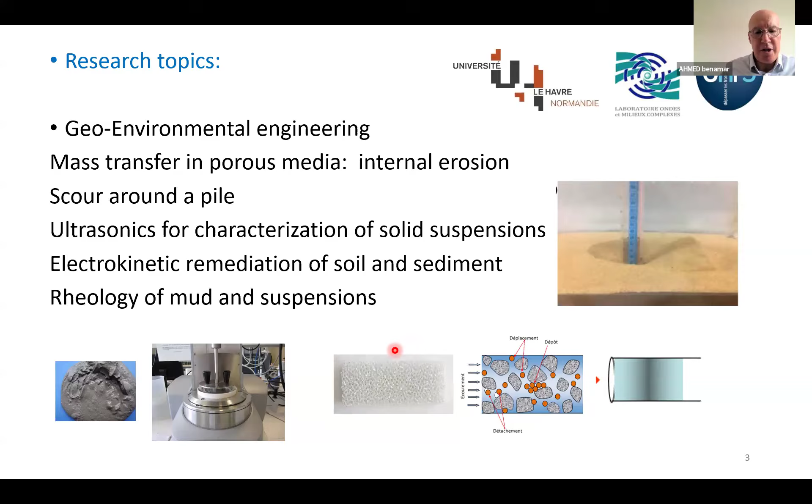Since we are in this area of maritime port, Le Havre is the first maritime port in France. So huge volumes of sediments are dredged annually. In Europe, there are 200 million cubic meters of sediments dredged each year, and in France, 55 million cubic meters are dredged, of which 24 million are contaminated.

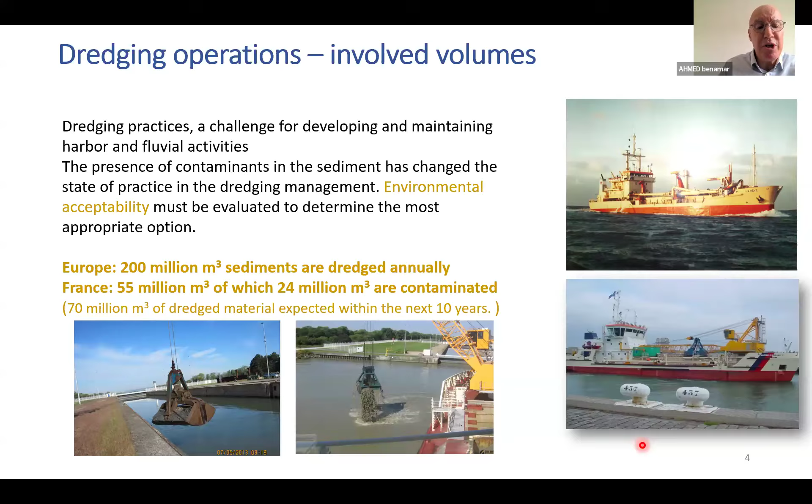This contamination has to be treated, and we use electrochemical technology to start remediating this material. These volumes are expected to increase up to 70 million cubic meters in the next 10 years.

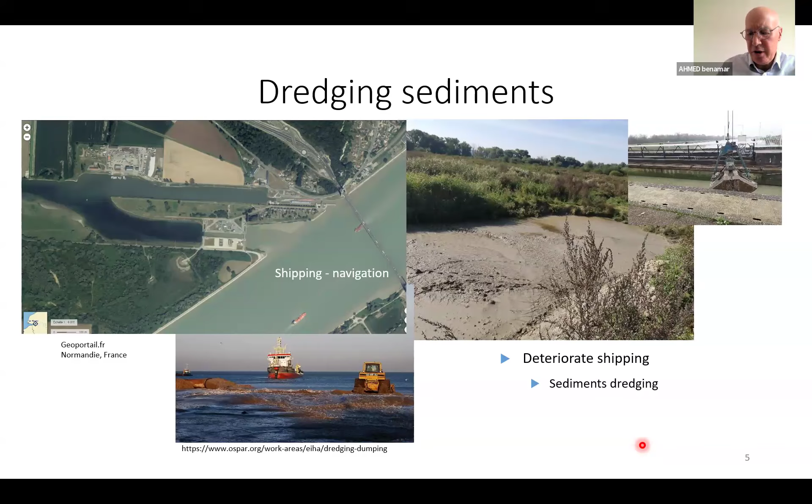In Le Havre, the silting of sediments is a huge issue, and in many operations the port had to dredge sediments and clap or dump them very far from the dredging location, so the cost can be more important.

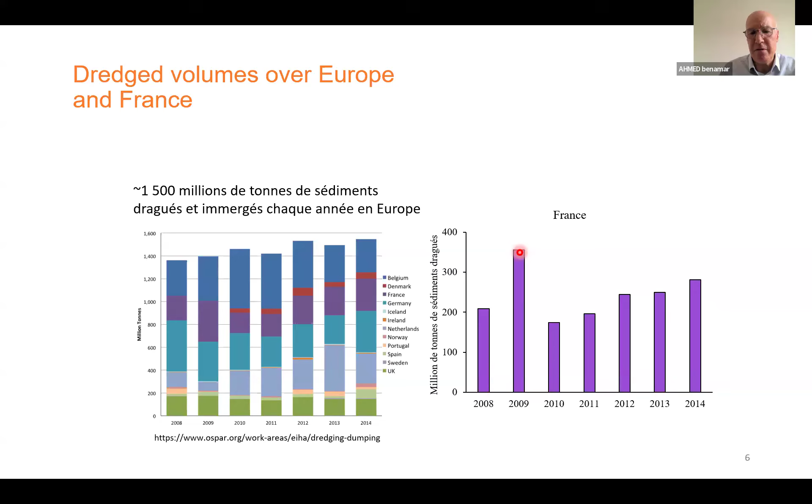So how are these sediments managed? 90% of these volumes are dumped in the sea, but submitted to regulations. Threshold values of pollutants are defined by European regulation, but adopted into local or national regulations, which define the allowed volume to be dumped in sea.

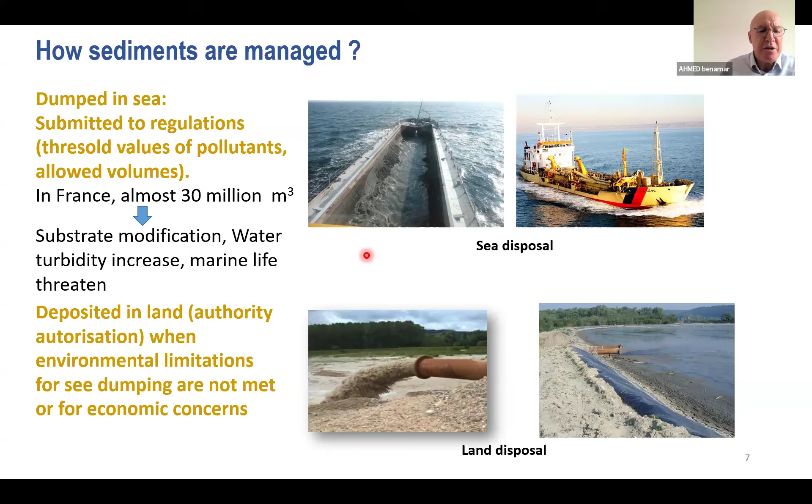In France, almost 30 million cubic meters are dredged and dumped. Substrate modification, water turbidity, and increased marine life threats were some issues which can be avoided if the sediments are deposited inland. Inland deposits are a special operation and not permitted every time—in Le Havre, for example, there were only 2 deposits for these sediments.

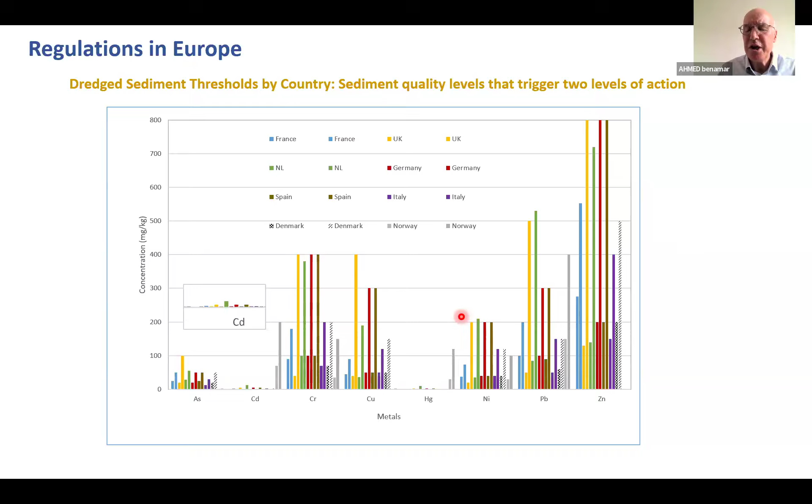As regards regulation in Europe, we see that the regulations are very heterogeneous. For example, for chromium, the limitations are maybe four times higher in many countries than in others. That's why many volumes of sediments can move from one country to another.

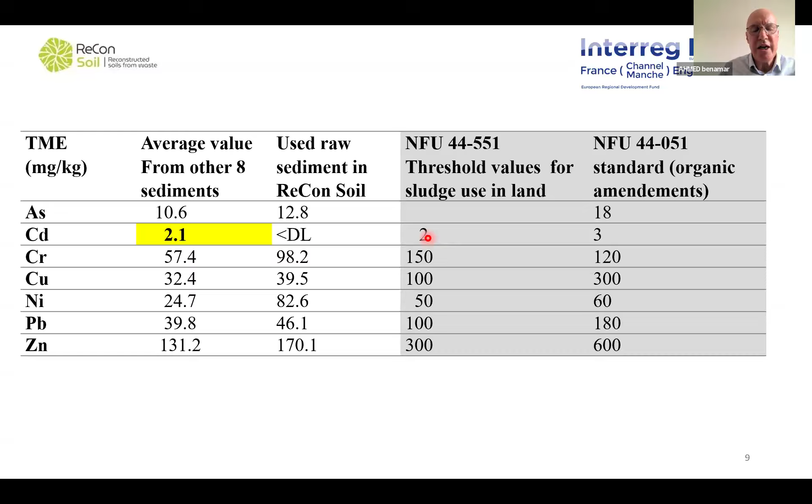These sediments are not so polluted, because as regards the regulations for sludge use inland or standard soil amendments, only cadmium exceeds the standard limit values. In France there are national regulations about soil, but no regulations about sediment. Sediment is regulated only regarding how many cubic meters of each volume can be dumped in sea, based on two levels, level 1 and level 2.

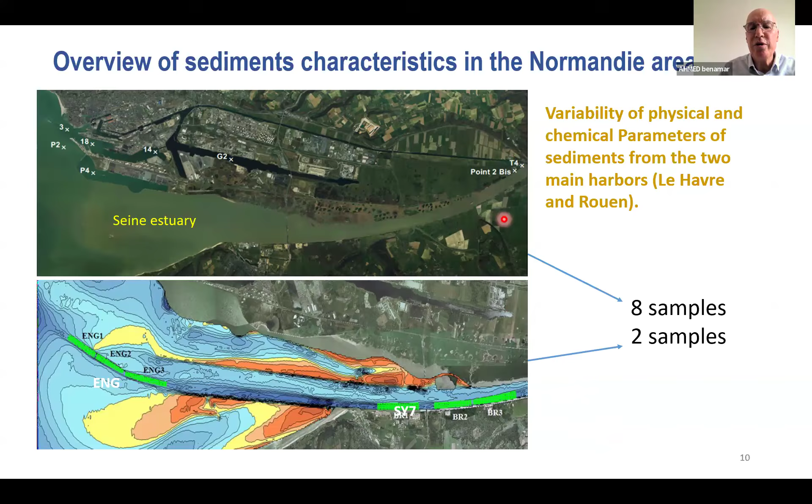In a past project we had to show how the variability of these sediments was over a large area, including the Port of Le Havre, the Seine River, and part of Rouen Port. 10 samples were collected, and from the grain size analysis we see that the extent of grain size is not so different, except for three samples.

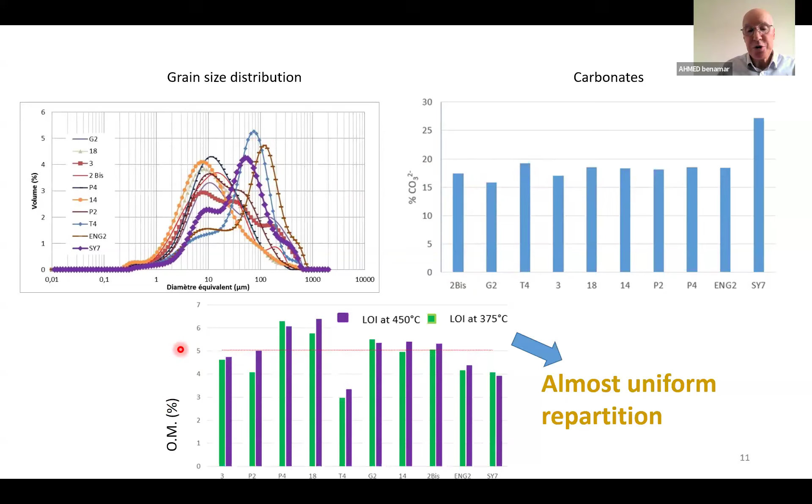The carbonates are also quite similar, around 20%, and organic matter is also similar, approaching 5%. This kind of investigation can show that this sediment can be used for any application, because we can expect regular characteristics for this material. This variability is also very low in chemicals and in minerals, so it can be interesting to use this sediment from a large area in Normandy.

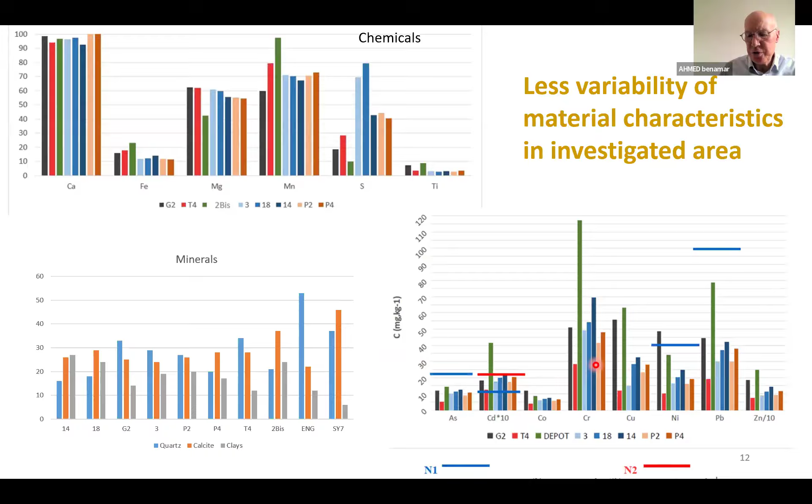As regards the two levels, level 1 and level 2, which are the regulations for dumping sediments in sea, in many situations these limitations were exceeded, but not by much.

So for the objective of using this sediment and keeping it inland, and maybe using it for valorization for reuse, two deposits were managed in Le Havre. The largest one is close to Tancarville, close to this bridge.

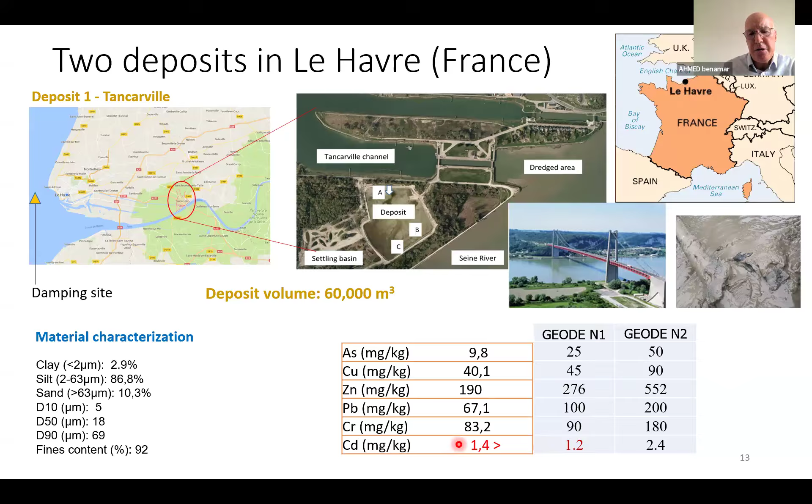There is 60,000 cubic meters of sediment deposited here in this area. For the sediment which was deposited, there is no excess of any metals, only for cadmium, which exceeds only by 0.2, so it's not so important. And this area was...

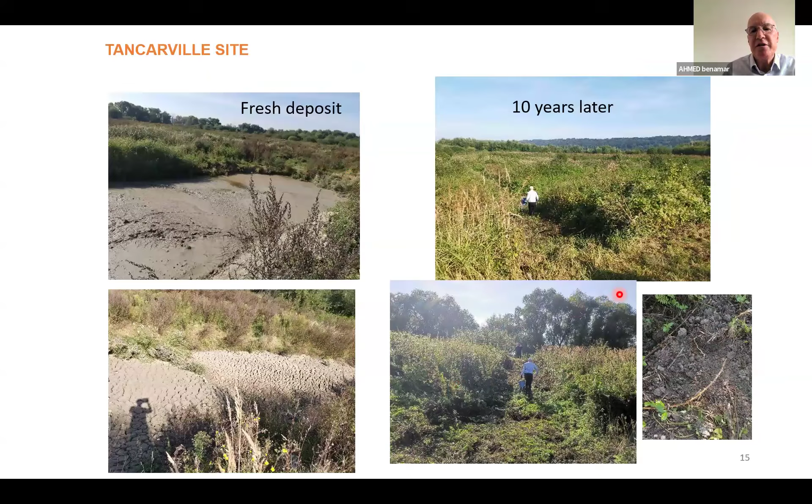immediately after filling the deposit, and 2 years later, the vegetation started to grow in this area. That shows that the sediment can serve as agricultural soil, as a medium enabling growing vegetation. And 10 years later, we see that it's almost a forest.

So this kind of deposit can be interesting for reuse in agriculture or in material construction. But the pollutant bioavailability is still there, so for many applications they may need to be remediated.

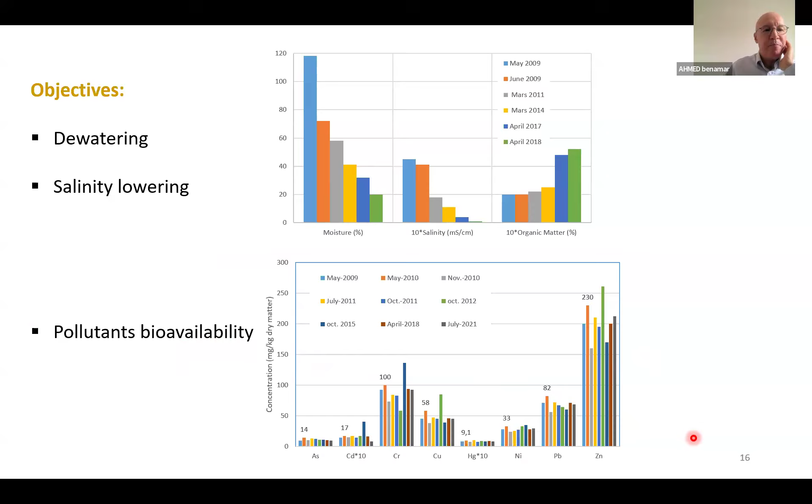The second deposit was managed during the project making bricks from dredged sediments, and this deposit was managed differently than the first one, with drainage and with a settling chamber.

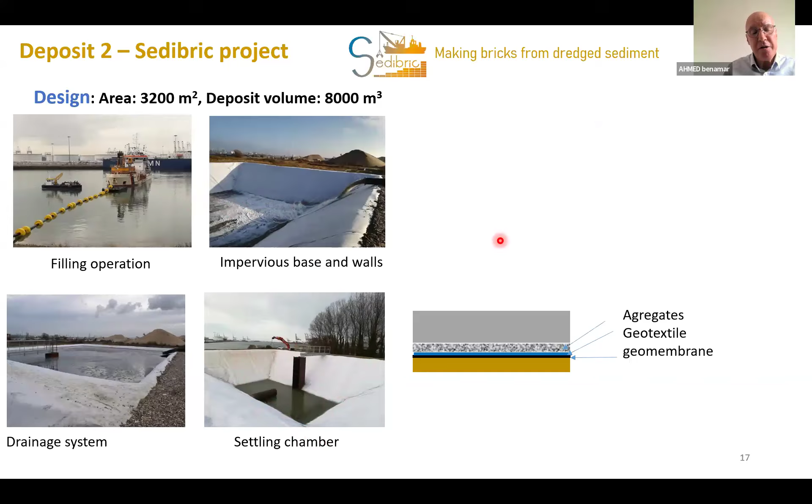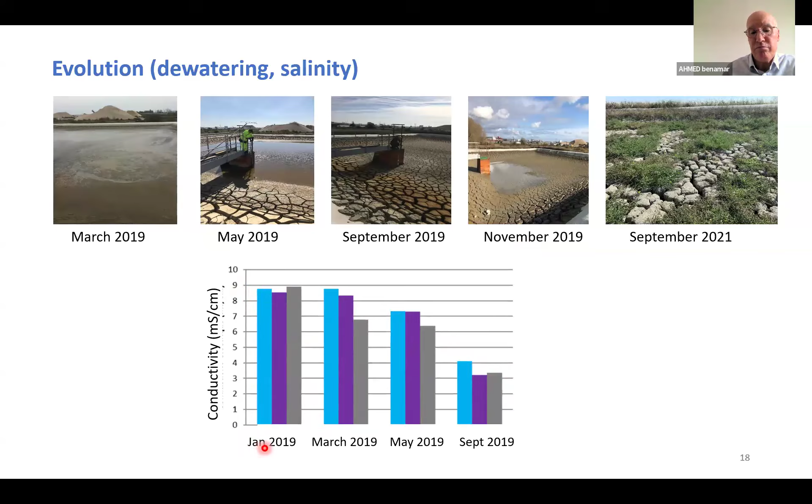So this deposit was monitored during many years, from 2019 to 2021, and we see that the conductivity, the salinity, decreased at 3 points recorded here. We see that the salinity decreased from 9 to almost 3, 3 times, in only 8 months.

Okay, so when the pollutant exceeds regulatory values, we need remediation. In our university, we started using electrochemical remediation because we are treating fine soil, fine material. Electrochemical remediation is deemed to be effective for this kind of material.

So we started with a small cell, and then we used a large setup with many kilograms, 60 kilograms of material, in order to mainly use this sediment in another project, but also to investigate the scale effect, the upscaling effect between the small setup and the intermediate setup, before using a field pilot.

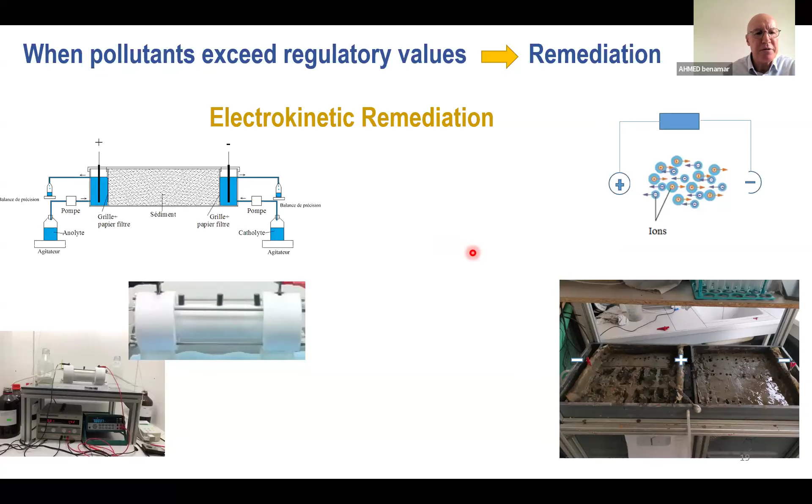The objective of sustainable electrokinetic remediation was to decrease chemical concentrations, dewater the material, enhance element bioavailability, using environmentally friendly additives, and reduce treatment costs by using less power consumption.

Here is the schematic drawing of the setup, and we have different additives used in many experiments, showing that EDDS and saponin, which are surfactants, can also be efficient for making the osmotic flow interesting, and so removing many kinds of pollutants.

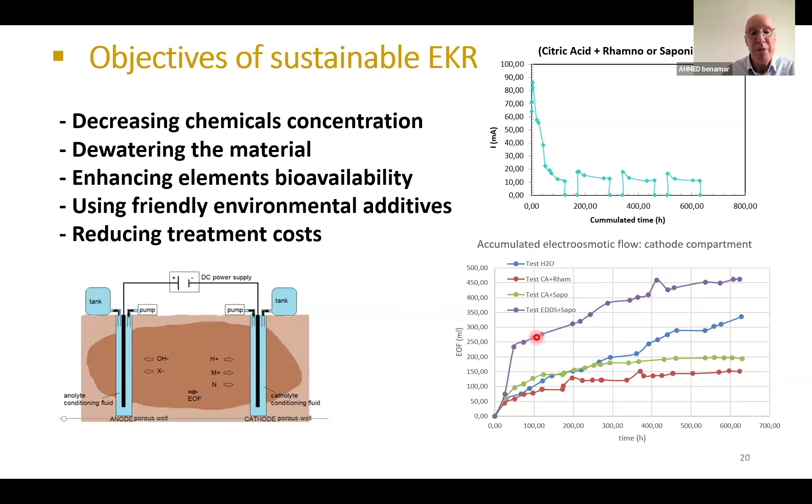Because we can treat different kinds of sediment soils, we investigate the effect of organic matter in different remediation tests. So we compare the application of EKR to reconstituted lab sediment and the collected sediment. The reconstituted sediment in lab was made according to the grain size distribution of the real sediment. It's a mixture of sand, silt, and clay, and we add 2.5% organic matter.

So in this case, the metals, mainly two metals, copper and zinc, move according to the charge. Here we see that with citric acid as additive, the lead moves to the cathode, toward the cathode.

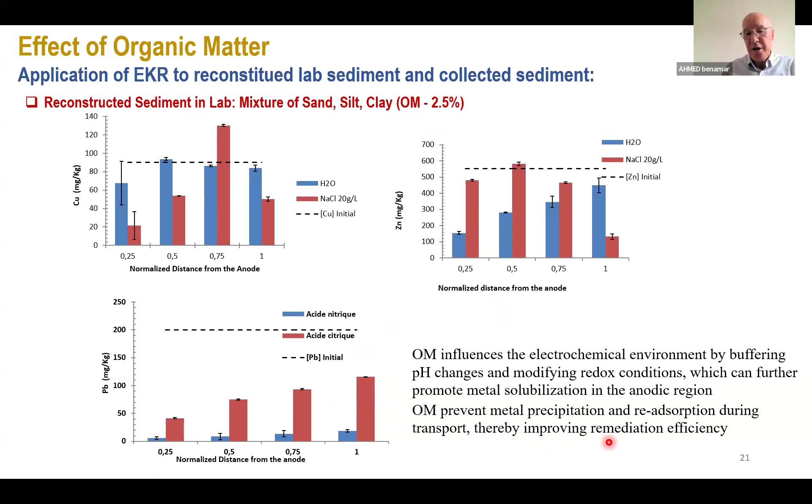But when we test dredged sediments from a deposit, which involve an organic matter content of 10 to 11%, we see that something happens: many metals can move. The cations can move to the anode instead of moving to the cathode.

This disturbance is due to the relatively high content of organic matter. So organic matter can play a role in the electrokinetic remediation process.

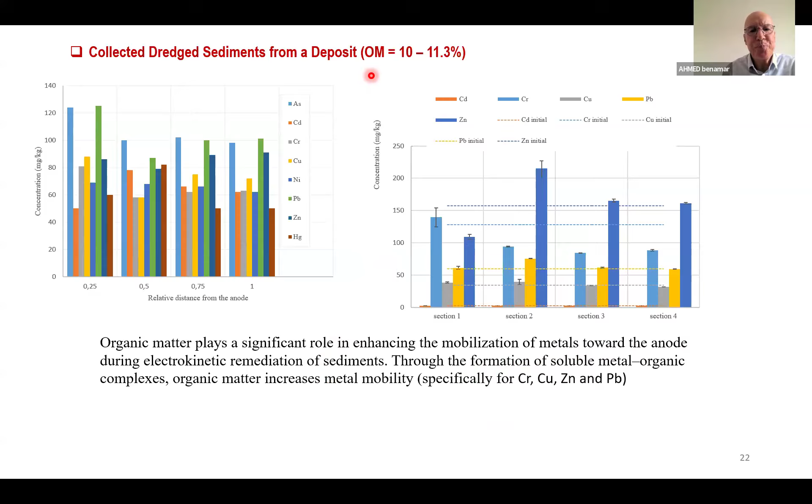After that, we used many sizes of experiments to start investigating the upscaling of this process in order to use it in the field. But we are still investigating this, because the theory of upscaling is different from other fields like hydraulics.

So we started by using bulk density as a parameter to be preserved from one scale to another, along with current density, temperature, and geometry. So when we increase the volume of treated sediment, the temperature rises and the process is inhibited.

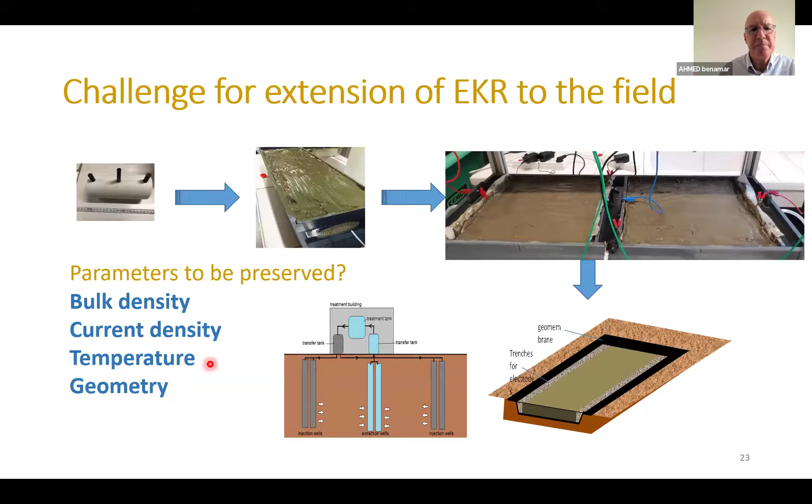So for using dredged sediments as a material for making soil or making construction materials, we started with this case of using sediment as a waste for reconstructing degraded soils. This is a European project which ended in 2021.

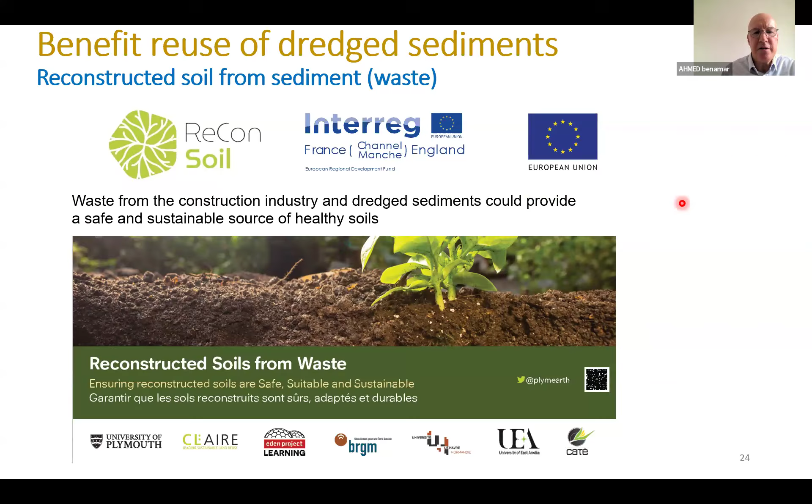Why can sediment be interesting for soil reconstruction? Because the sediments investigated in this area of Normandy ports are rich in fines, 92%, around 6% clay, and also rich in organic matter and other minerals. So they can be suitable to reconstruct soil.

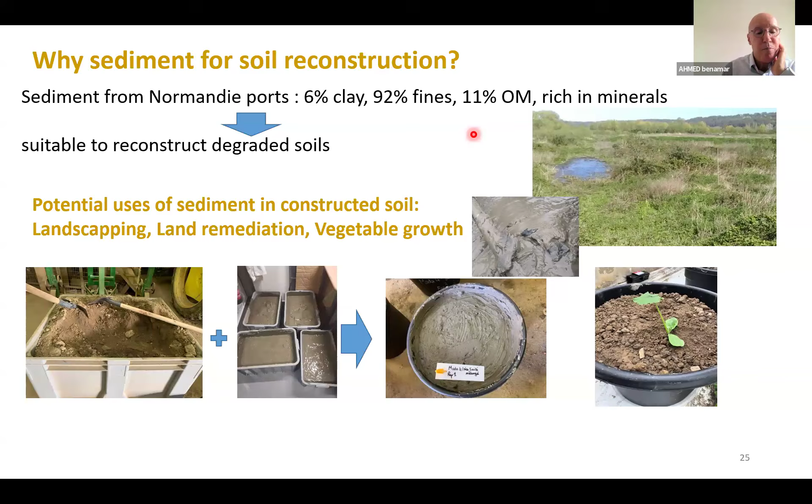In this project, we suggested from our side that dredged sediment be added to degraded soil in Brittany to grow zucchini. Other partners from the Geological Bureau in Orléans suggested that fines from byproducts be used also as amendment for degraded soil which was poor in fines.

This operation can be made in the larger framework of anthropization of the soil-sediment-soil cycle. Sediments are eroded from the soil, going to rivers and channels, so they are dredged and can be used for treating, reconstructing, or amending degraded or agricultural soil. This operation can be interesting in the framework of using waste as a resource.

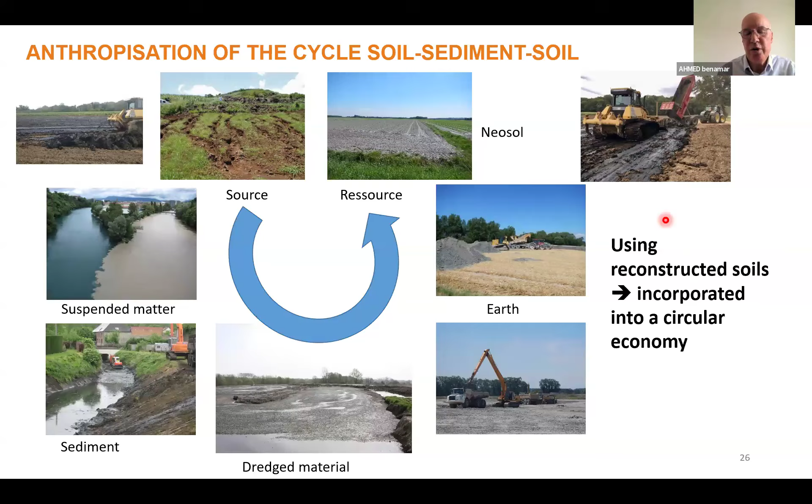The experimental setup for treating these sediments was in the same shape as the smaller setup. We treated more than 60 kilograms of sediment to be used for reconstructing soil. In this operation, we used non-treated sediment and electrokinetic treated sediment.

We wanted to see how the electrokinetic process changes the composition of the soil, and if there is any effect on growing vegetables or crops. So we checked where each process happens in the sediment during treatment, and the physical-chemical properties: pH, conductivity, redox potential during the experiment, and after the experiment, mineralogy, total carbonates, organic matter, and metals.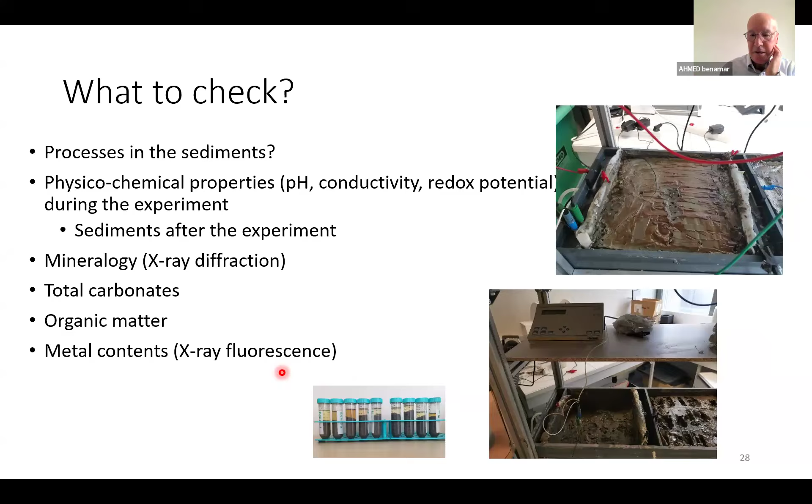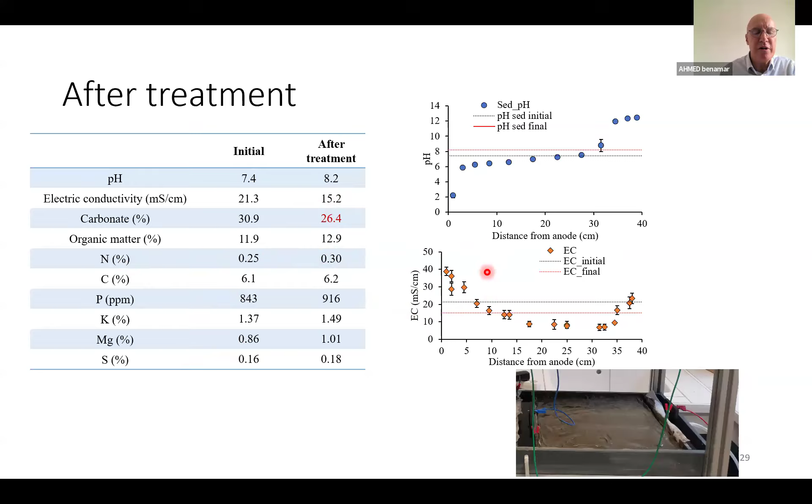After treatment, we see that only the carbonate decreased. There is no change in the other parameters, especially elements like nitrogen, carbon, phosphorus, potassium, magnesium, and sulfur. So only the carbonates, because of oxidation in the anode part, were dissolved—a part of the carbonate was dissolved following this reaction.

For this soil construction project using waste like sediment, we used five samples: the first with completely treated sediment by electrokinetics; the second with 30% treated sediment added to 70% regular degraded soil; the third with completely non-treated sediment; the fourth with 30% non-treated sediment and 70% regular soil; and the fifth as the control sample.

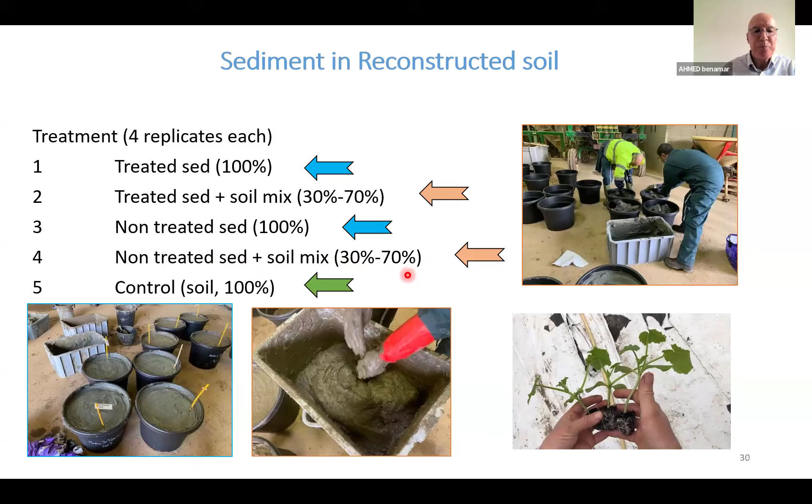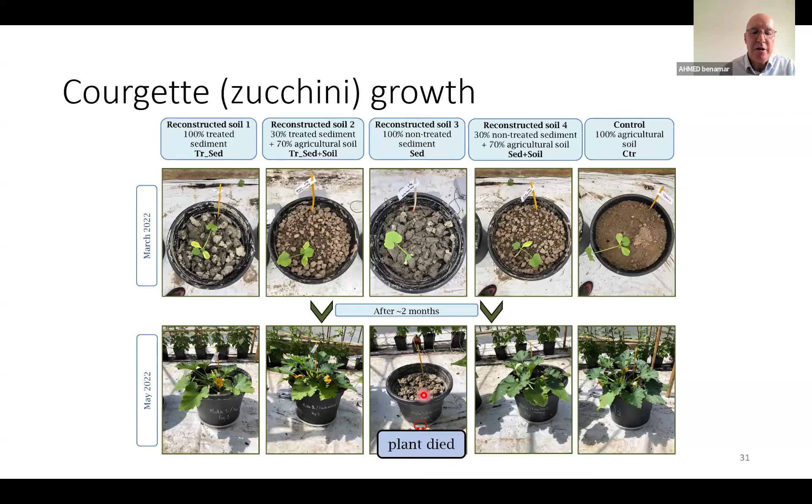The first sowing was made in March 2022, and in all situations the zucchini grew except for the completely non-treated sediment. For that sample, the crop died after two months.

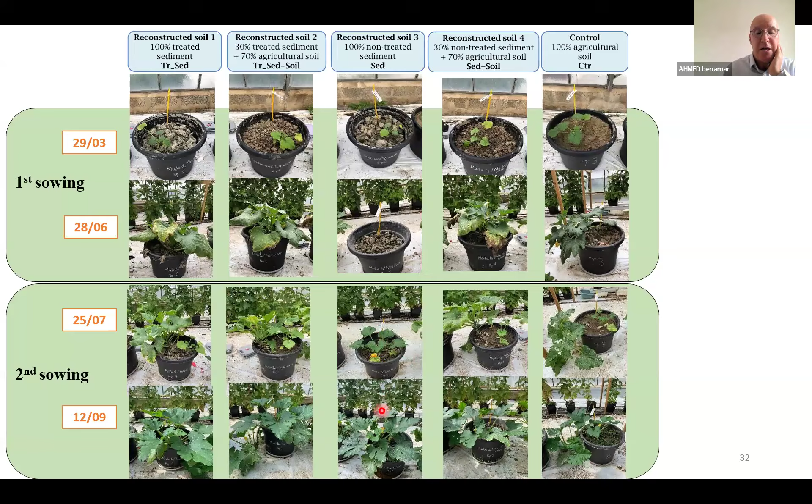Following that, in July there was a second sowing in the same soils. This time, the completely non-treated sediment was successful—the growing of crops was successful. We think this is because irrigation lowered the salinity, and that effect may have allowed the crop to grow in this second sowing.

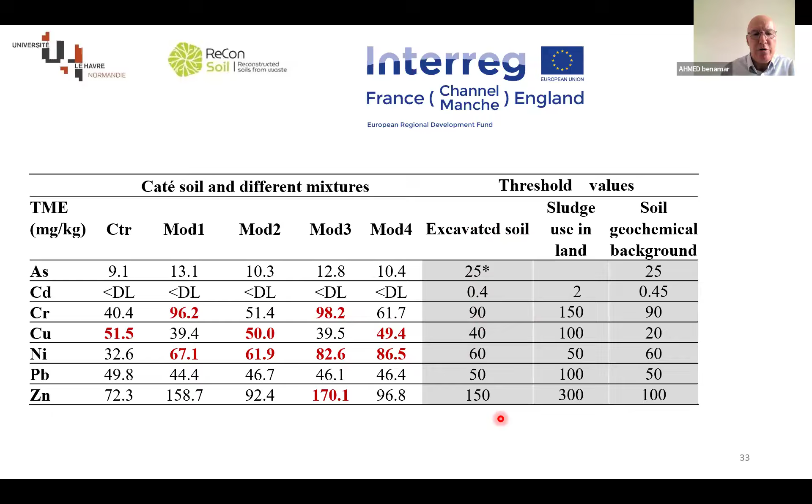When we analyzed the different samples regarding the various metals, we see that in many situations, for many metals, we exceed the threshold value for excavated soil, but not by much. So this sediment, or this mixture of sediment and soil, is not so dangerous for use in agricultural soil or in landscaping.

Regarding metal accumulation, as the vegetables or crops grew, we analyzed how the metals were moving from the sample soil to the crops. We tested two metals here, copper and zinc.

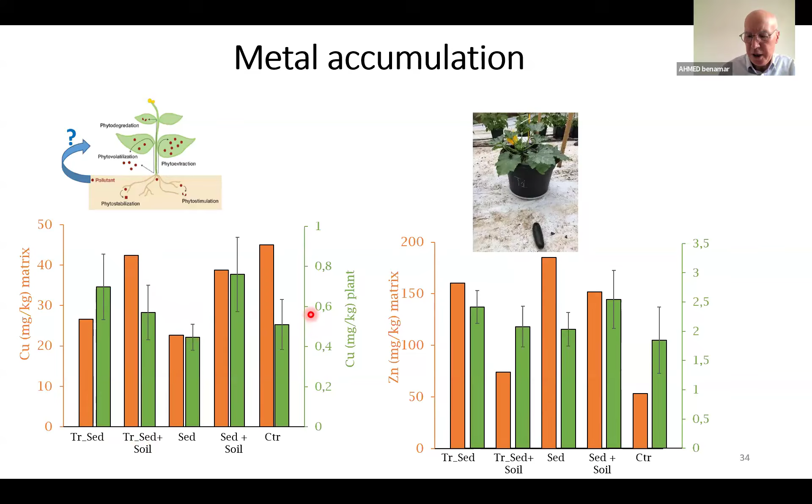In the soil/sediment matrix—for example, for the treated sediment added with soil—we reach 40 milligrams per kilogram, while after growing in the plant we don't reach 0.6. So the transfer between the soil matrix and the plant is very negligible, and we can say the risk of contamination of plants is very low.

Let's talk now about the valorization of sediment for construction material. The first construction material used was fired bricks. In that project we used many mixtures of sediment and clay.

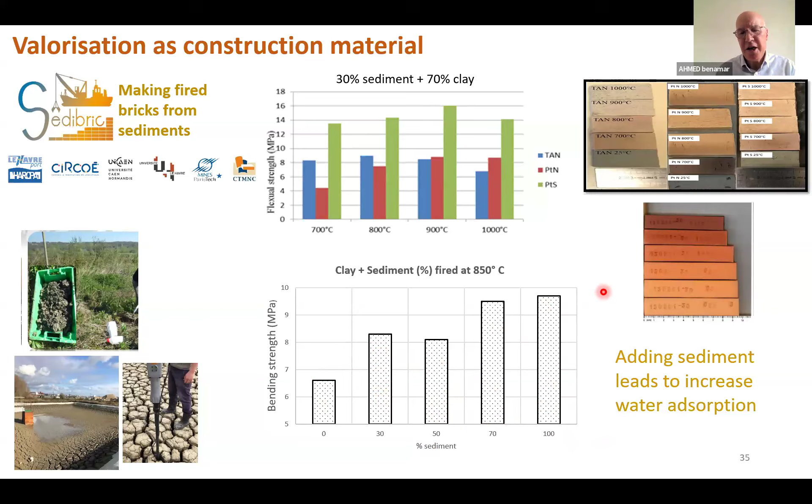We used up to 100% sediment to make bricks, and this material met the construction material standards, exceeding 9 megapascal bending strength. So it's adequate material for making bricks as regards strength, but adding sediment leads to increased water absorption when we exceed 30% sediment, and degradation or white coloring can appear because of salt contained in the sediments, which can also affect the brick's appearance.

The third use of sediment, or valorization of sediment, was the use for manufacturing lightweight aggregates. This project is ongoing. It was funded by European funds with a company which is involved in and leading this project.

They constructed a pilot for firing these aggregates to be used in lightweight concrete, or as landfill, or as lightweight materials, or also as isolating material.

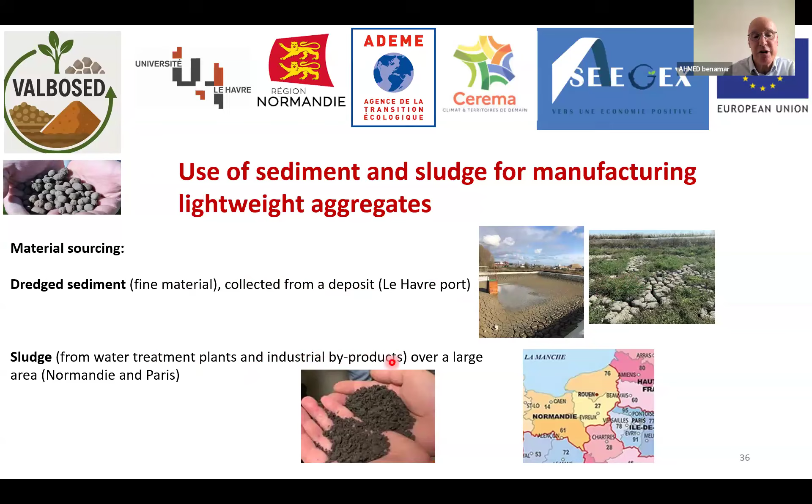The dredged sediment for this project was collected from the second deposit we showed before, which is a smaller one, and the sludge was collected from water treatment plants and industrial byproducts, which are rich in organic matter or carbon, over the large area of Normandy and Paris.

The process of firing: we mix the materials where they were shaped and dried before being fired, then cooled. This is an example of the first sample of aggregates which were fired.

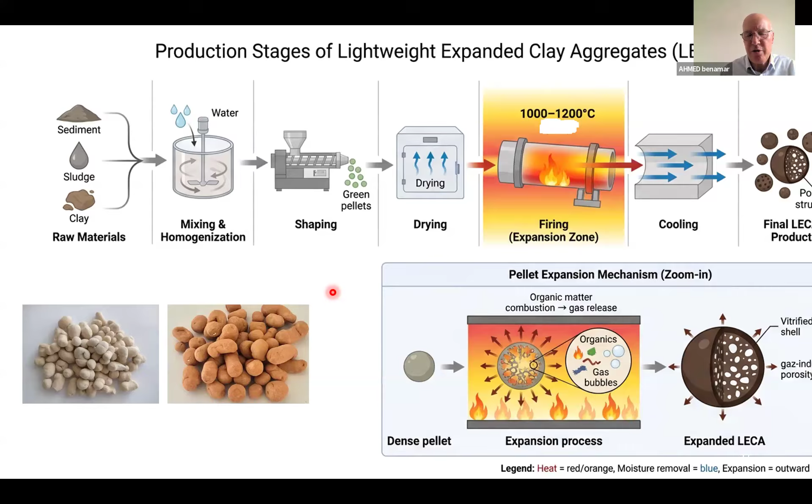The operation makes the aggregates expand, and the addition of sludge, which is very rich in organic matter, makes the aggregates light and porous, giving them thermal and acoustic properties.

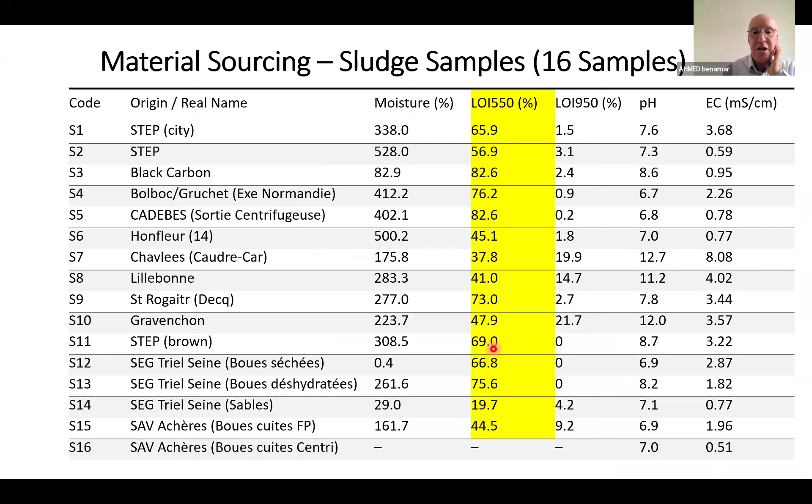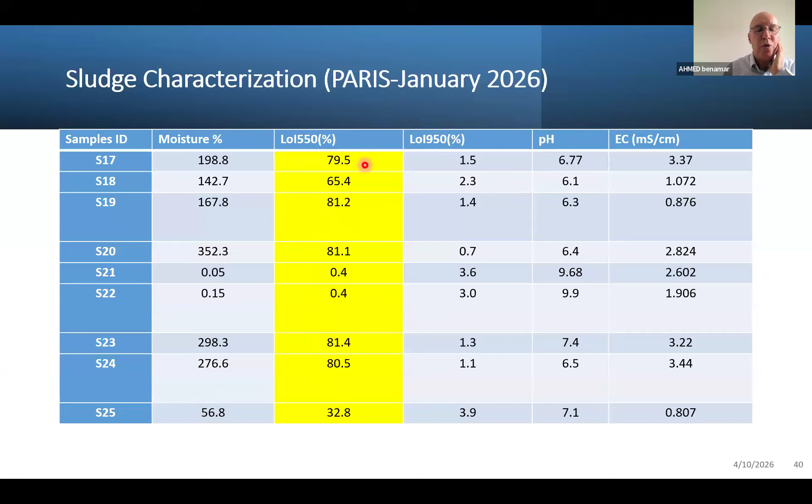If we look at the sediment samples collected to be mixed with sludge, they are almost rich in organic matter compared to other soils. For sludge samples, the organic matter can reach more than 80%, so it's a very rich material in organic matter, also in samples collected from the wastewater plant in the Paris area.

This kind of matter is predominantly amorphous, not so much quartz, presence of halite, and high organic matter content, so it can be used for aggregate manufacturing.

It can act as a pore-forming agent, and by organic combustion it reduces the density of aggregates and enhances internal porosity, but the contained salt can also affect the durability of such material.

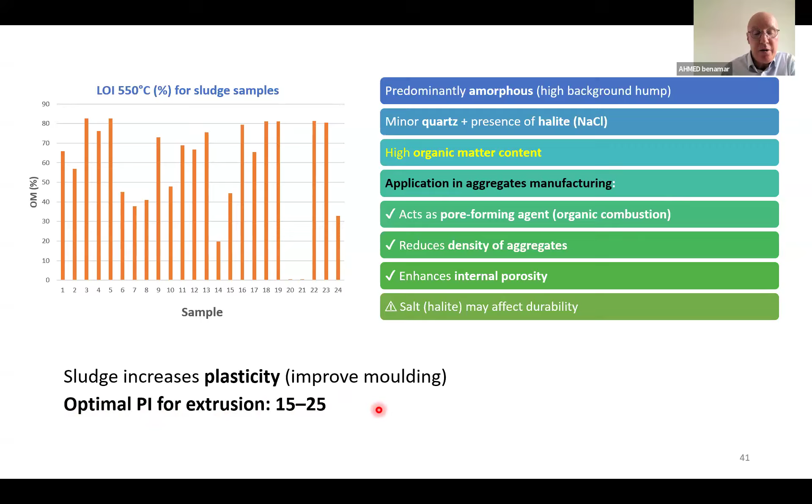So before using the mixture and shaping it, we measure the plasticity of different mixtures, and we see that sludge increases the plasticity of mixtures, improving the molding operation. The optimal plastic index for extrusion was found to range between 15 and 25.

For the aggregate formulation, we made six formulations by mixing sediment and fine clay particles, which came from the exploration of excavated soil, and we measured the shear strength of each mixture in order to link shear strength to the molding facility of this material as aggregates.

We used the vane apparatus to measure these values of shear strength, and we see that when the water content increases, the shear strength decreases consistently.

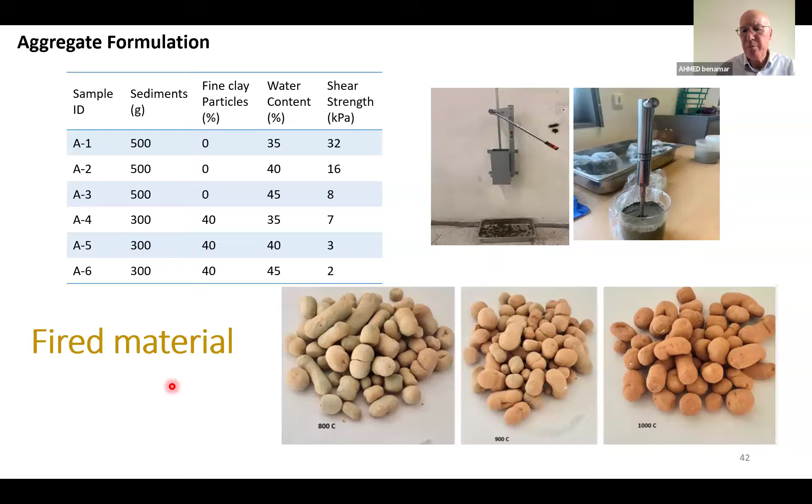For the fired materials, there were three firing temperatures: 800, 900, and 1000 degrees, which show that the color can change because of oxidation and modifications of mineral phases in the material during firing.

So I just finished my presentation, but there's also the task of when we cannot manage sediments inland, how we can manage it at sea. This idea started 10 years ago from North European ports, which began to investigate how we can keep the sediments in the seabed.

requires providing land disposal, but in many situations we cannot have any surface for these deposits inland, and because dredged sediments are very wet, they need to be dewatered before using in any application, so we need a large area. This issue is very challenging, especially for small ports.

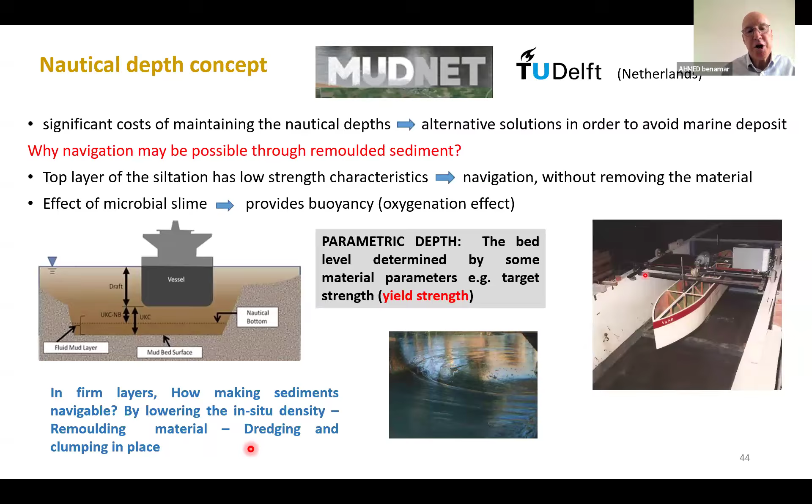So the question is how to make sediments navigable: by lowering the in-situ density, removing materials through dredging, and clumping in place - just disturbing the sediment structure in place.

So this behavior in muddy water can be investigated in laboratory by rheological investigation, but in the field at sea it can be investigated by echo sounding results, frequency dependent. So the challenge now is to be able to monitor this layer of suspended sediment, because the available echo sounding techniques now just monitor the consolidated bed of sediment.

Which level has to be maintained, and where is the nautical depth? Nautical depth means for each concentration we can stop at this nautical depth.

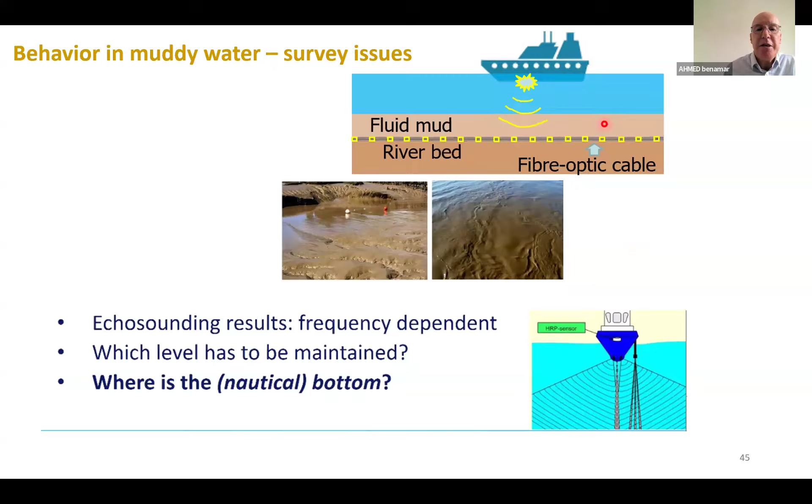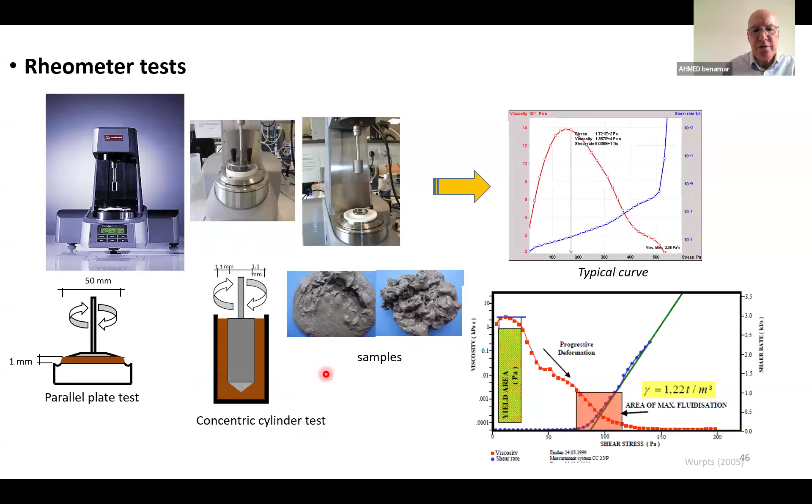So this question was investigated in lab using rheology. We used two kinds of rheometers: parallel plate test and also concentric cylinder test, and a stirrer also. This geometry was used to investigate such samples of mud.

The last study used this kind of geometry, the stirrer, which can continuously remold the sediment, because settling can affect the measurements. Here is an example of the testing protocol, and the results of shear stress versus the shear rate, showing the yield stress here, and the viscosity.

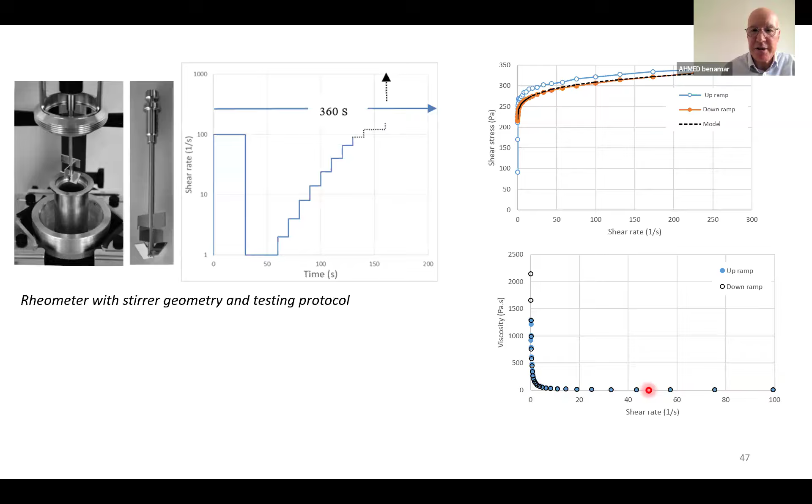So from that investigation, the study used 4 sediments, different sediments collected from the first operation, when we started making bricks with the sediments. So point P3 is the coarser sediment, and P18 seems to be the finest sediment.

So in this data from rheology tests, we show that the shear stress of sediment P3 was the higher one. So because when we also investigated the plasticity of such materials, P3 shows the higher plasticity and also the higher yield stress.

High plasticity sediment can provide higher yield stress, more pronounced shear thinning behavior. Organic matter further modifies sediment rheology by enhancing particle aggregation and structural complexity. The yield stress and shear thinning characteristics are particularly relevant indicators of ship–mud interaction.

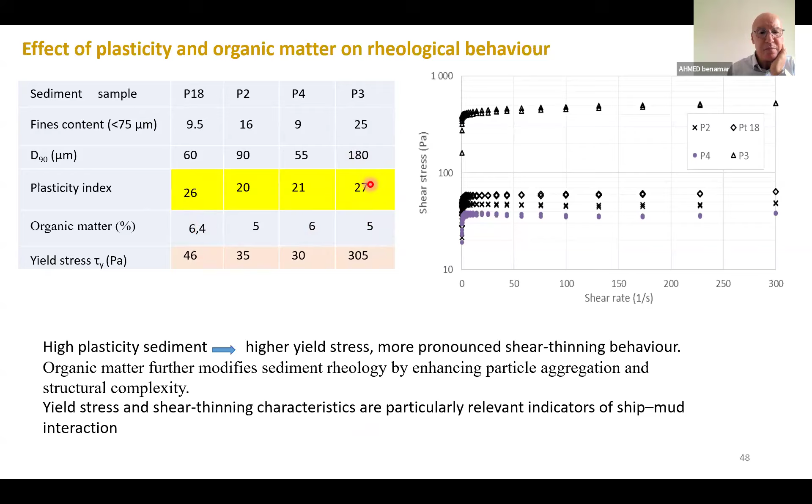In this kind of study, the organic matter is quite the same, similar for these 4 samples, but because of the plasticity of sample P3 and because of the coarse grains of this sample, the yield stress was more important.

In another study of the rheological behavior of sediments from the port of Havre, we show that for different situations, the shear thinning before rest and after rest.

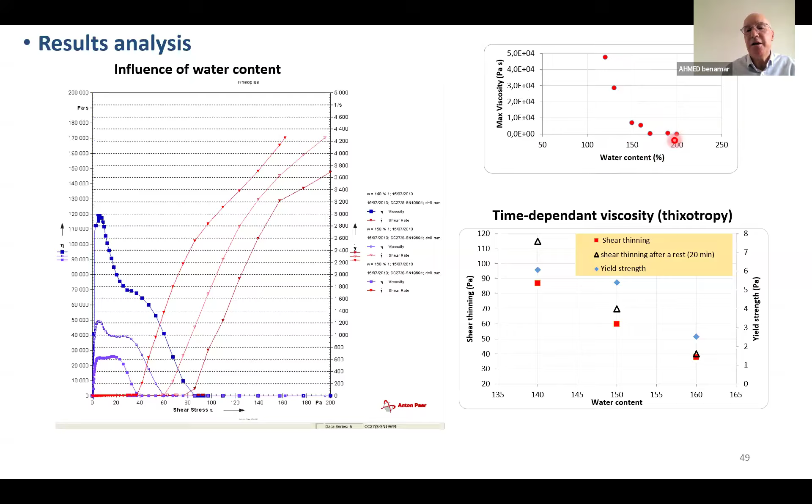So in different conditions, the rheological response of such material is different, and we see here that the viscosity was decreasing when the water content increases, and this kind of material can show a thinning characteristics during the test.

Okay, I finish by summarizing all the results I showed. Great volumes of sediments are dredged over the world, and their dumping at sea is no longer sustainable. Solutions ashore must be extensively used to ultimately make durable materials from sediment and save natural deposits.

Reconsidering what wastes actually are raw soils. So many excavated soils, many dredged sediments cannot be considered as wastes. Dredged sediments are still underrated due to regulations. The regulations are very severe toward this kind of materials. In parallel, remediation techniques have to be effective and sustainable to meet regulations and reduce costs.

So now I think from this year, from last year, the European regulations for making sediments into land deposit are changing, and I think there will be more and more land deposit of such material.

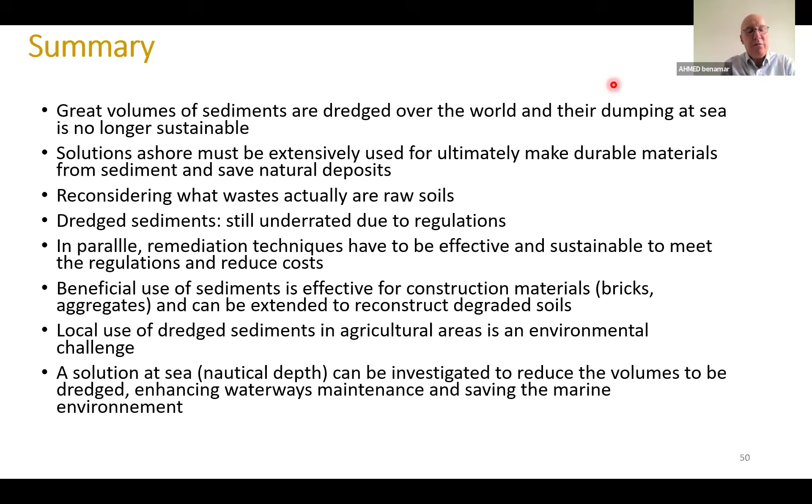Beneficial use of sediment is effective for construction materials, brick and aggregates, and can be extended to reconstruct degraded soils, as we showed. Local use of dredged sediment in agricultural areas is an environmental challenge, and the solution at sea by the concept of nautical depth can be investigated to reduce the volumes to be dredged, enhancing waterway maintenance and saving the marine environment. Thank you for your attention.